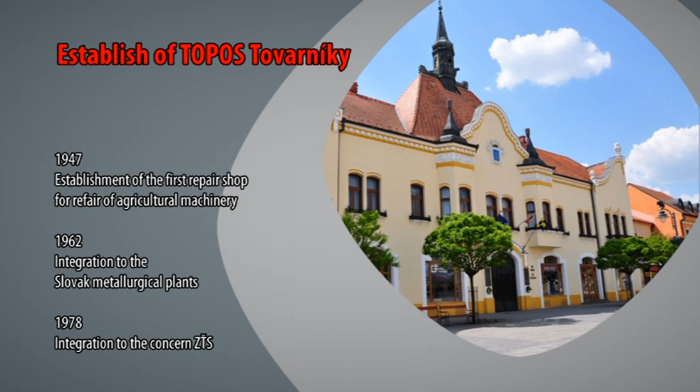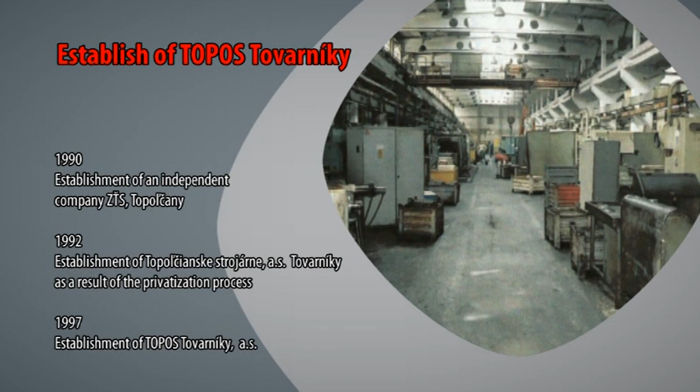Joint stock company TOPOS Tovarníky is a result of the long-term development of machine production in the region of Topoľčany. The company history dates back to the short period after the Second World War in the form of workshops for the repair of agricultural machinery. The establishment of Topos Company was the culmination of several developmental stages, accompanied by changes of ownership.

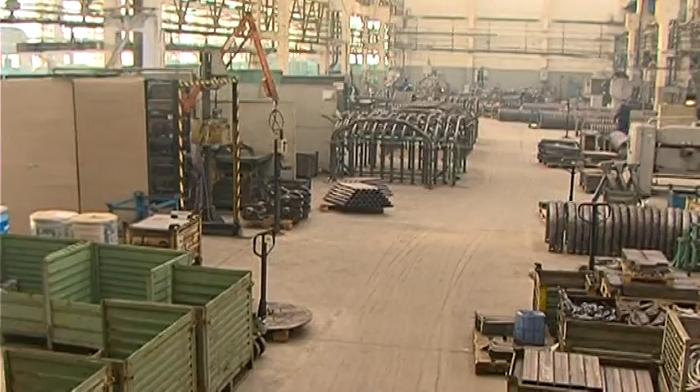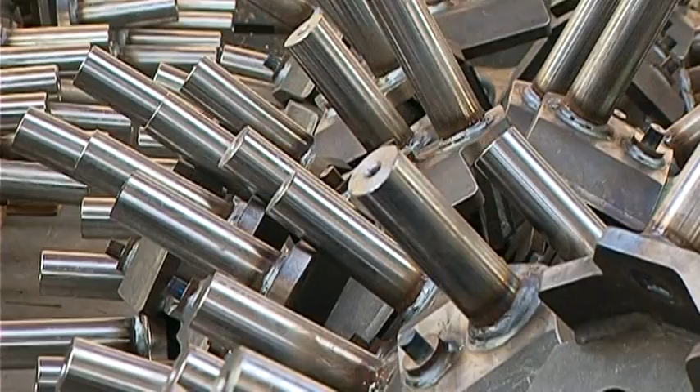The production company's focus is orientated to the manufacture and supply of machinery components. The focal point of our technological facilities area is components for hydraulic machines for final manufacturers of construction and other industrial machinery, components for agricultural machines and mechanisms.

The company TOPOS Tovarníky is a holder of quality system certificates for the quality management system according to European standards ISO 9001, the quality system of welding according to European standards ISO 3834-2. The short-term goal is the certification of the environmental management system according to standard ISO 14001.

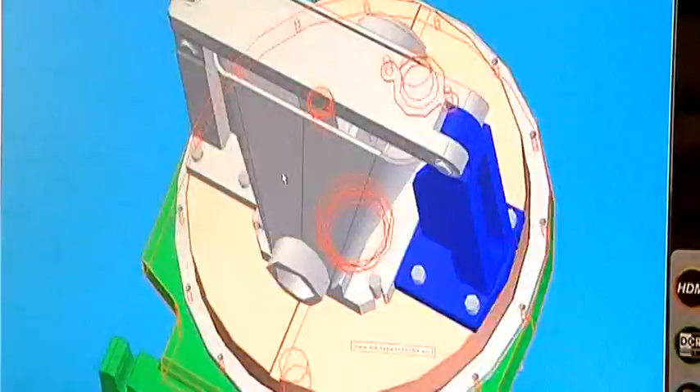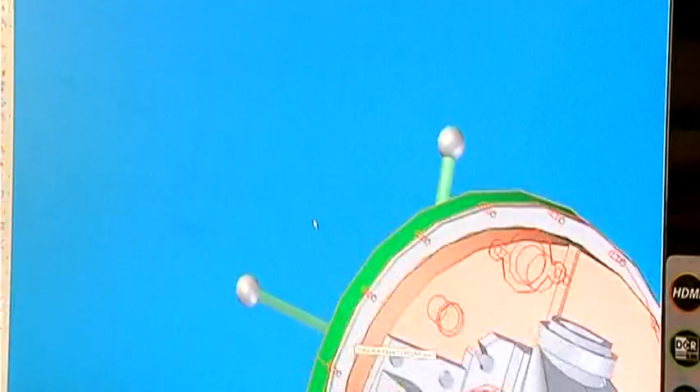The complexity and diversity of technologies allows us to provide components with a wide range of dimensions and shapes. Technological capabilities allow the complex process of semi-products using several technologies.

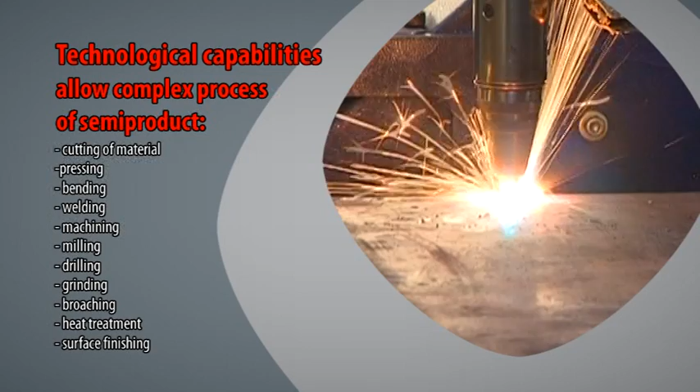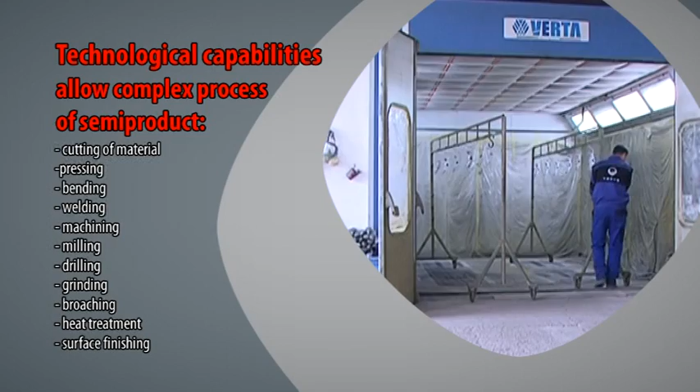For programming of CNC machines, we use EdgeCam software, and for the design of products, Solid Edge version 17 software, enabling 3D component design and creating 2D drawing documentation.

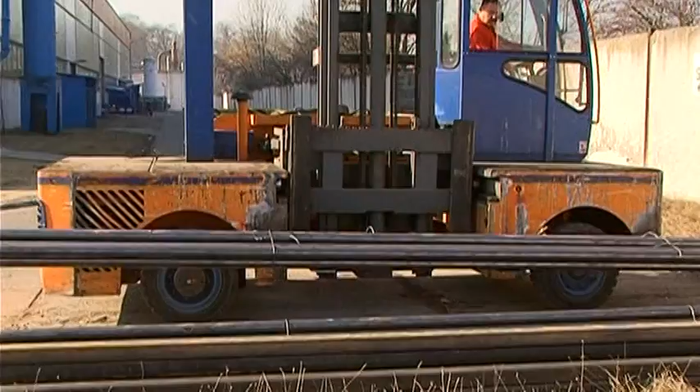Material flow begins by the checking of the raw material, which is important to ensure material quality in the production process.

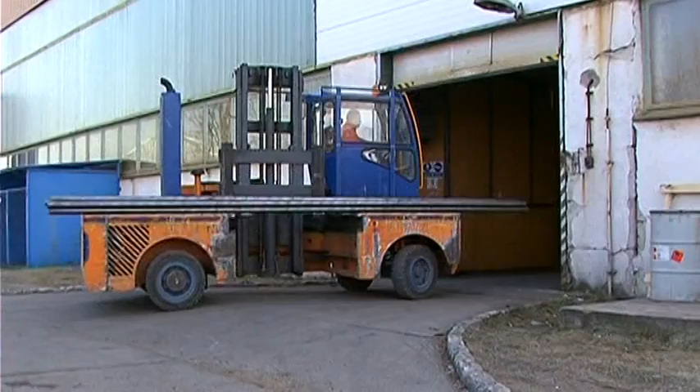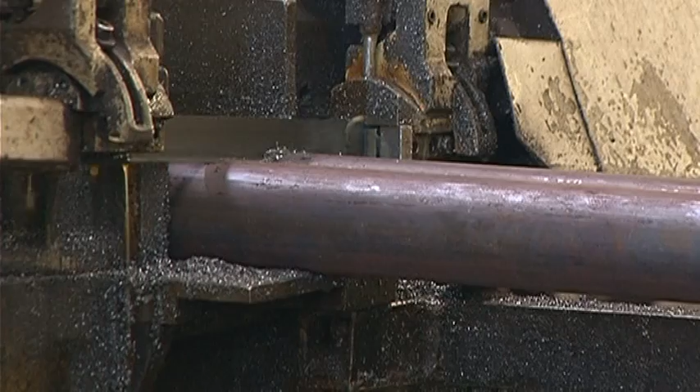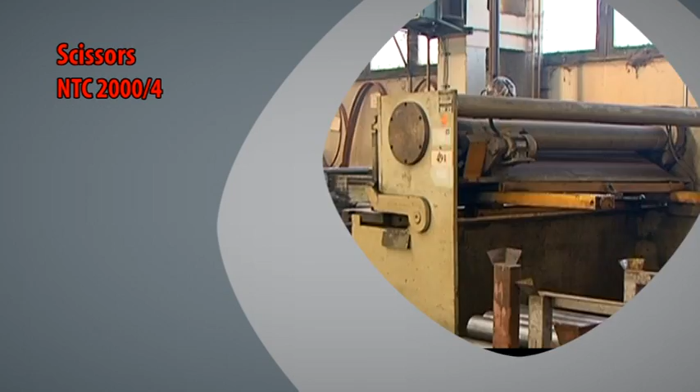For cutting of materials, we use several devices: bandsaw, Bomar GA330NC, scissors NTC 2000/4, plasma Pierce Excalibur 2500.

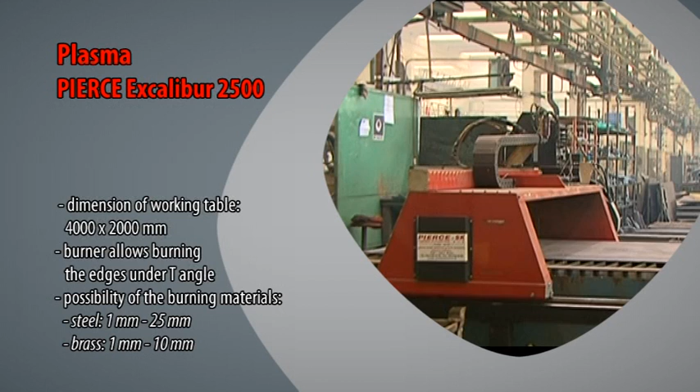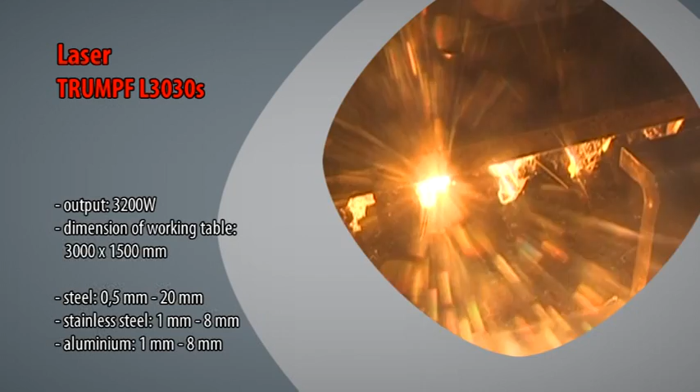Laser TRUMPF L3030S. Dimension of working table 3000 by 1500 mm and output of 3200 watts.

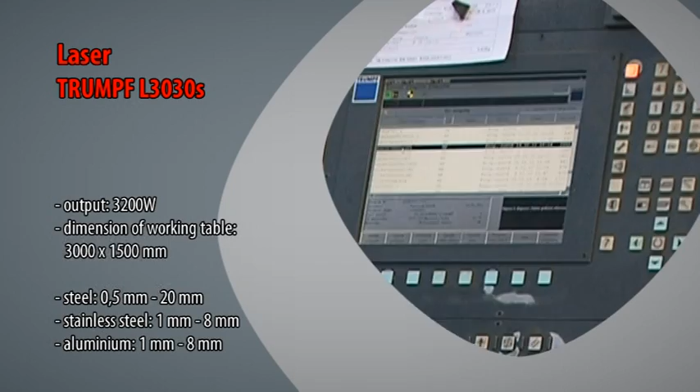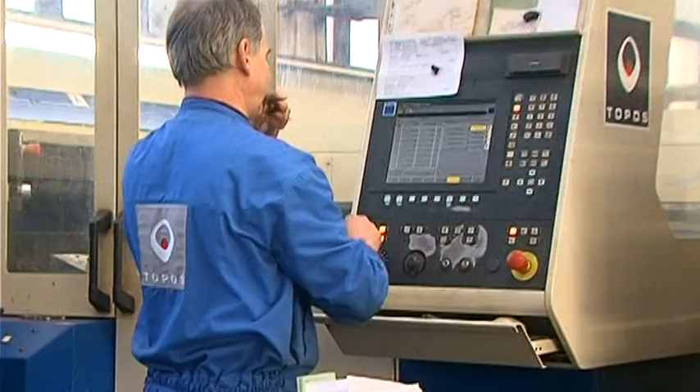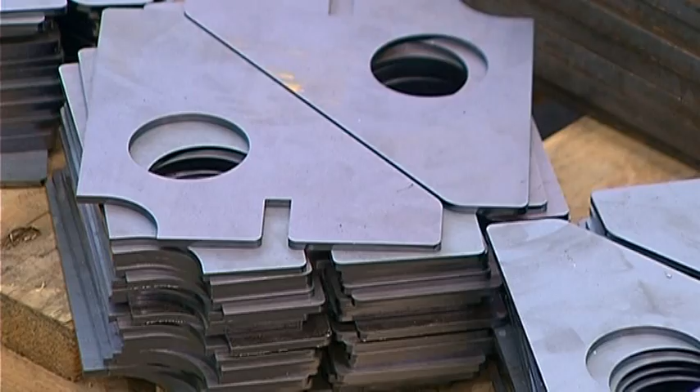The additional laser device, Rotolas, allows the machining of tubes by changing the position from vertical cutting of the metal sheet. This device allows the machining of edges of square profiles by exact calculation of the cutting speed and movement on the Z-axis, ensuring precision cutting of materials.

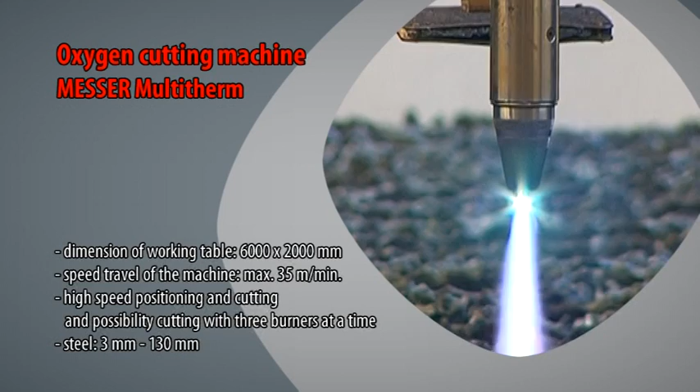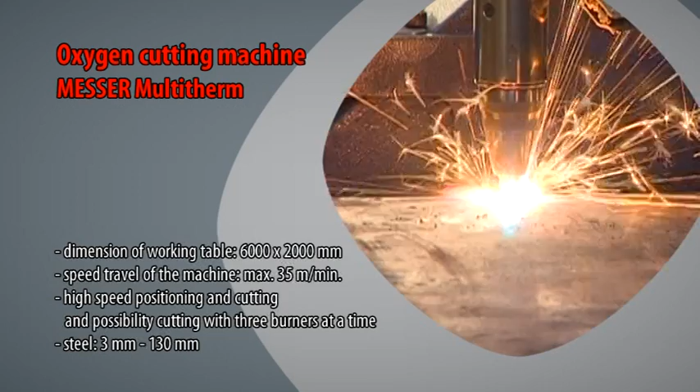Oxygen cutting device Messer Multitherm. Dimension of working table 6000 by 2000 mm. Speed travel of the machine is 35 meters per minute, a result of high-speed positioning and the possibility of cutting with 3 burners at a time.

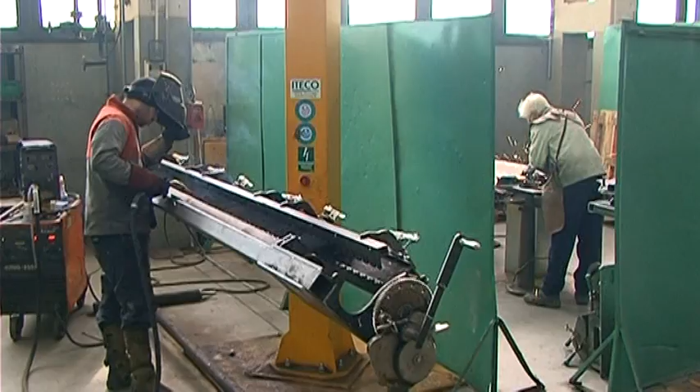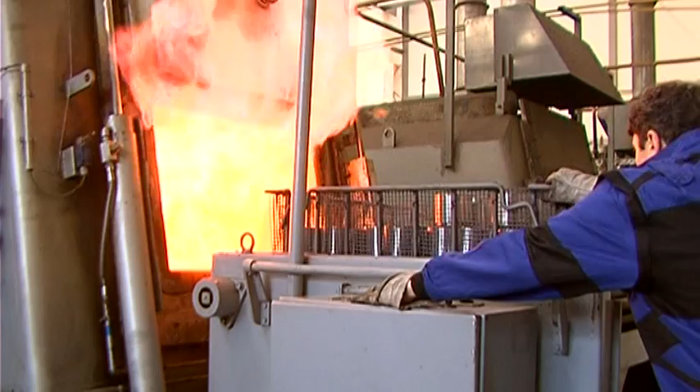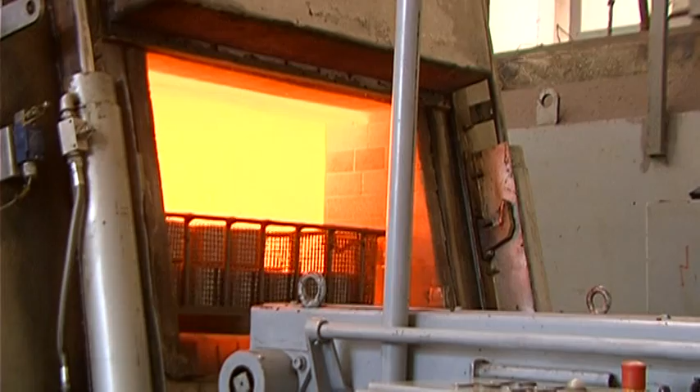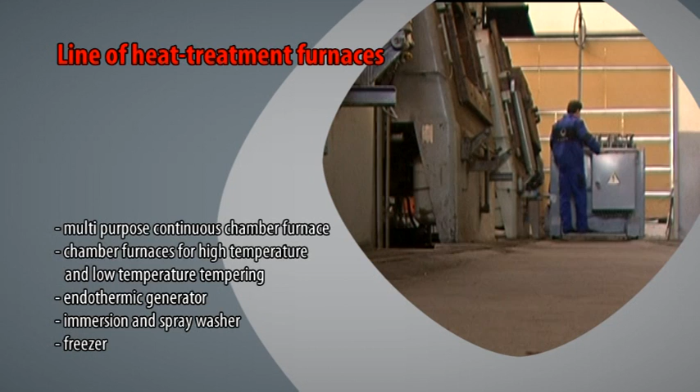A key technology of our company is also the heat treatment of parts. The line of heat treatment furnaces is a complex of mechanized equipment that allows heat and chemical thermal treatment in a protective atmosphere. It consists of a multi-purpose continuous chamber furnace, chamber furnaces for high temperature and low temperature tempering, an endothermic generator, immersion and spray washer, and freezer.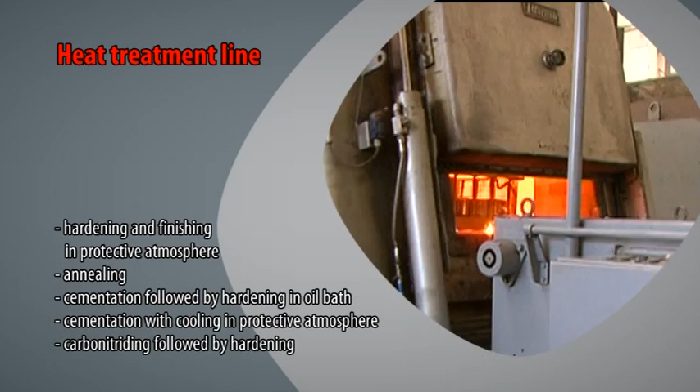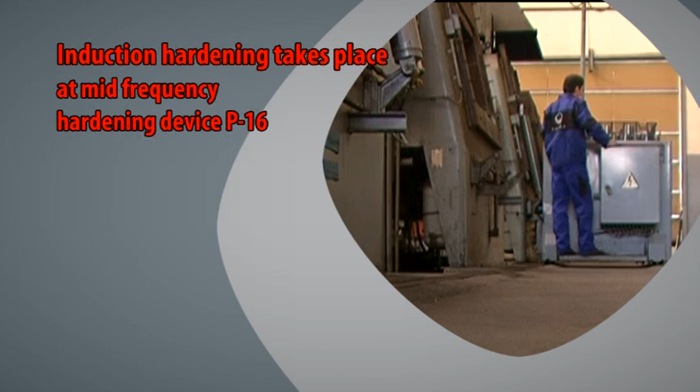The heat treatment line ensures the process of hardening and finishing in a protective atmosphere, annealing, cementation followed by hardening in oil bath, cementation with cooling in a protective atmosphere, and carbonitriding followed by hardening. Induction hardening takes place on the mid-frequency hardening device P16.

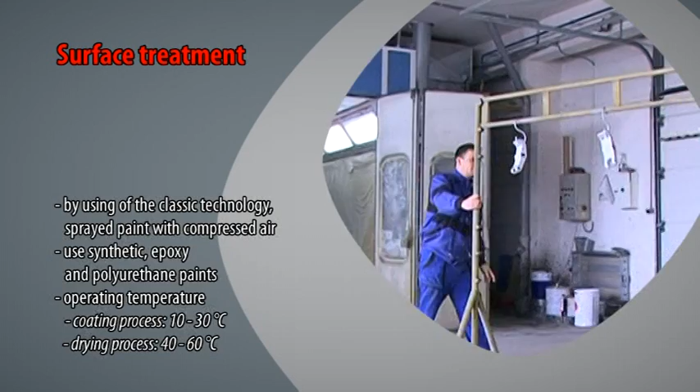The painting process is ensured by using classic technology, spray paint with compressed air. For coating, we use synthetic, epoxy and polyurethane paints according to customer requirements.

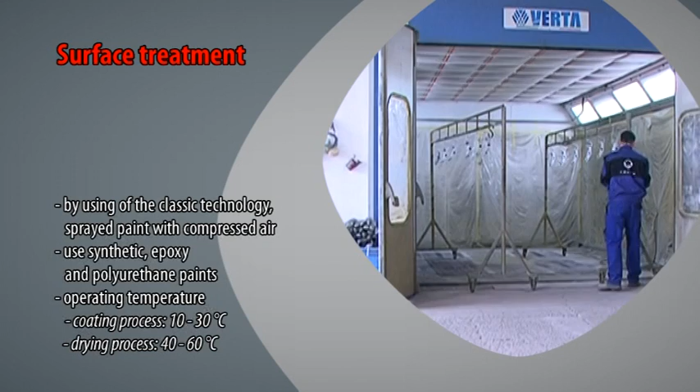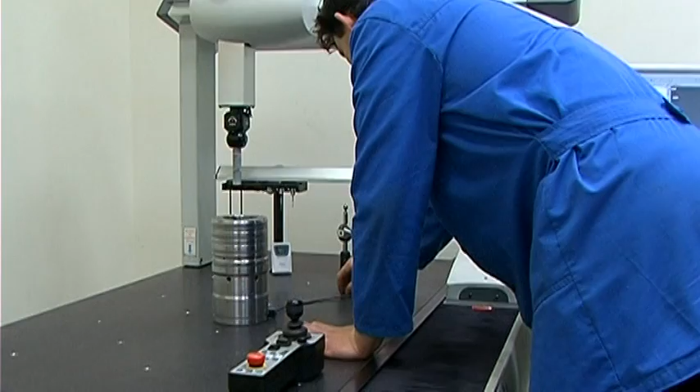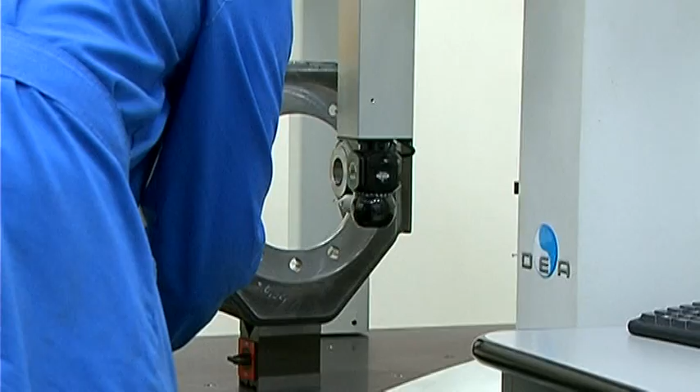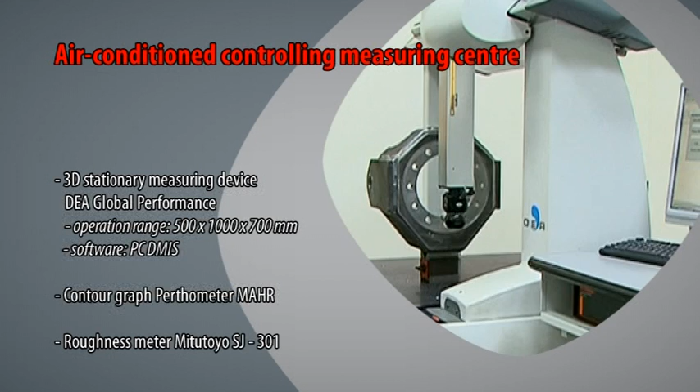Quality has become a dominating and decisive factor in the company. Product quality is achieved by a system of intermediate operation and final inspections, ensured by an air-conditioned controlling measurement center equipped with a 3D stationary measuring device, DEA Global Performance, Contour Graph Perthometer, MAHR, Roughness Meter, Mitutoyo SJ301.

Furthermore, we use a mobile 6-axis 3D measuring arm with high-precision absolute sensors.

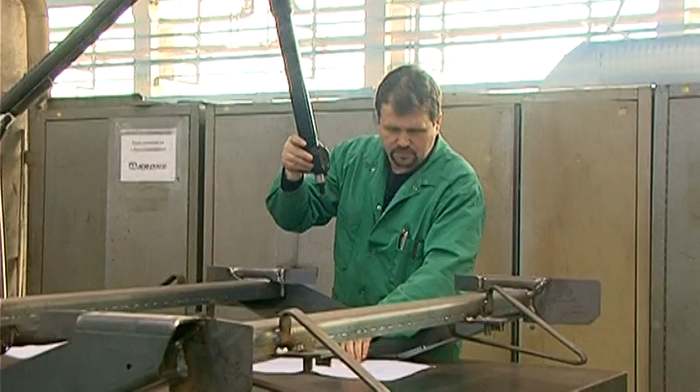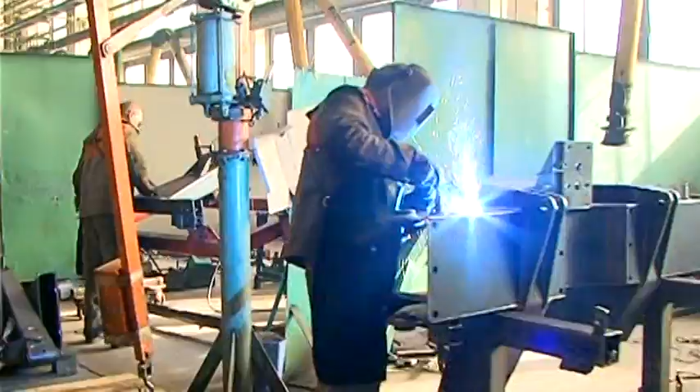The joint stock company Topos Tovarniky supplies more than 80% of welded and machined products, mainly to Western Europe. The rest is for the domestic market and other parts of Eastern Europe. Part of the production has gone to the Americas recently.

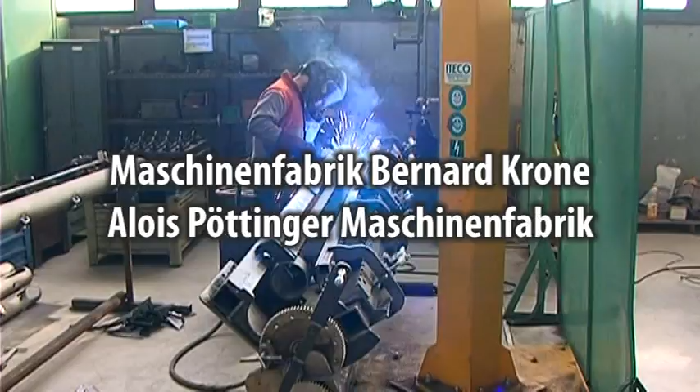The biggest suppliers are successful companies of resonant names, mainly manufacturers of agricultural machines, and furthermore, manufacturers of construction machinery and equipment. Other customers are from various German companies and Slovak and Czech manufacturers of hydraulic systems.

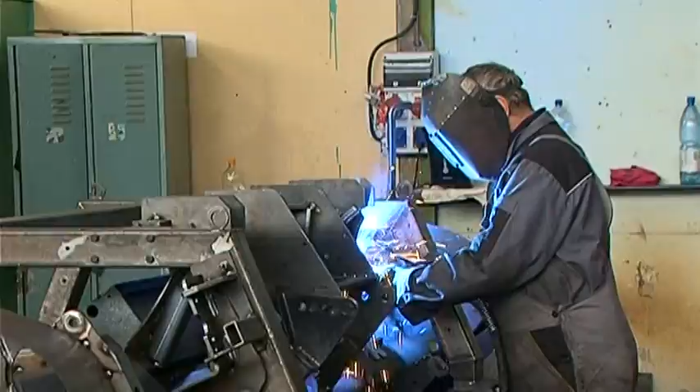At the end of the year 2011, our company was awarded the prize Supplier of the Year 2011, awarded for progress in the manufacture and supply of weldments for the last 3 years by the customer Maschinenfabrik Bernard Krone. The joint stock company Topos Tovarniky has become, in the process of development, capable of offering quality in all areas of management.

Learn and achieve progressive development to fulfill the attributes of a stable business partner. The main idea for the future period remains in the present: art in mechanical engineering.